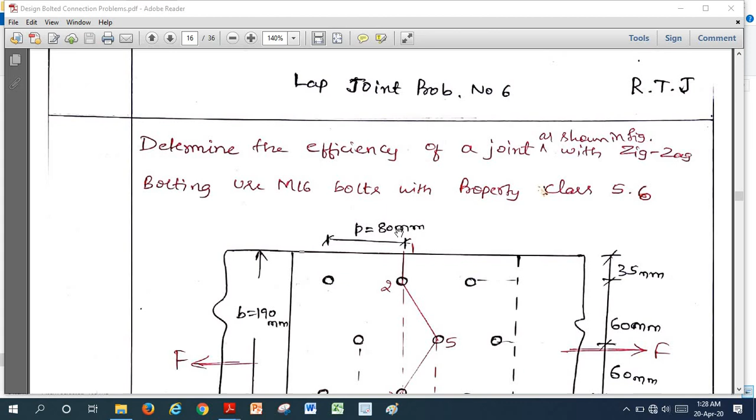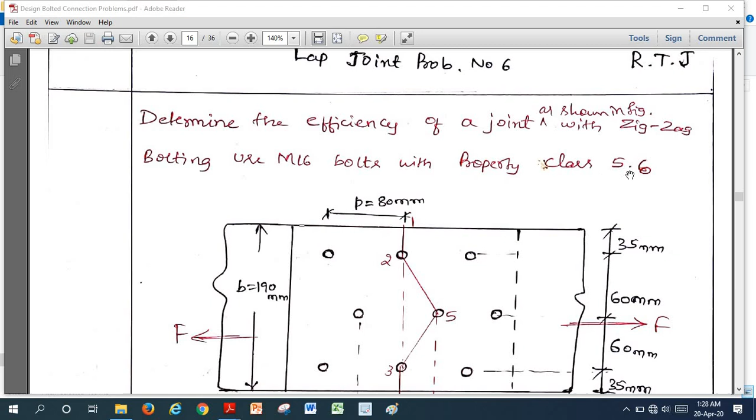Here the bolts are in zigzag form, not in rectangular format. The problem statement: determine the efficiency of the joint as shown in figure with zigzag bolting. Use M16 bolt with property class 5.6 grade. So this is the figure.

They've given bolts 1, 2, 3, 5, 4, 6, 7, 8, 9 here with an end distance of 35, gauge of 60 mm and 35. But the pitch given here in the same row is 80 mm.

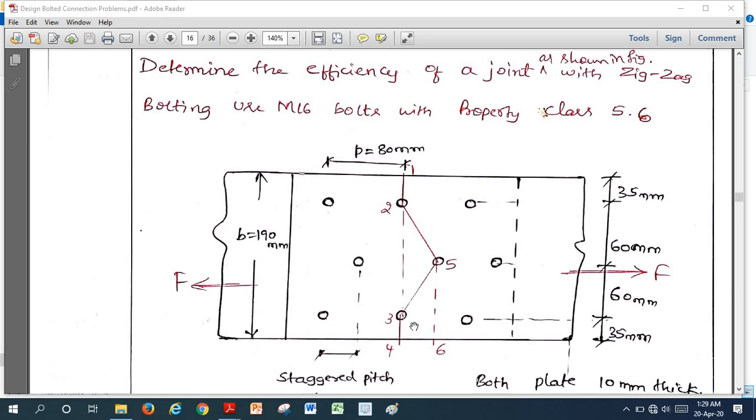If you measure the pitch from the starting column of the bolt to the next bolt, we call it staggered pitch. Whereas two consecutive bolts in the same row we call regular pitch, that is 80 mm along the force direction, perpendicular to force, and 60 is the gauge distance. So this pitch we call staggered pitch, from the first bolt to the next bolt in another row. This staggered pitch is 40 mm.

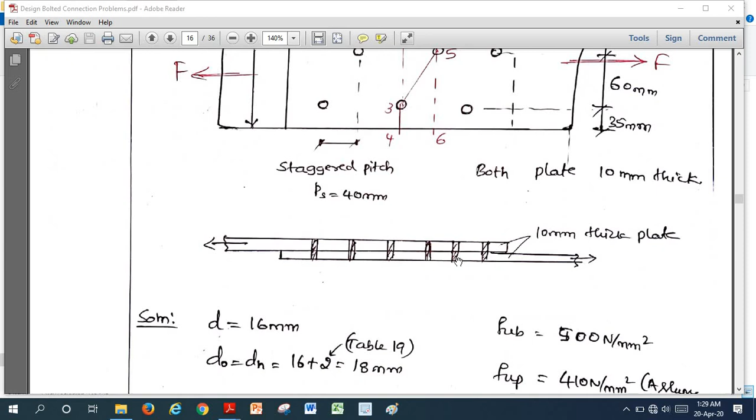Here both the plates being connected are 10 mm thick. So this is another view. Now we know how to write all the data here.

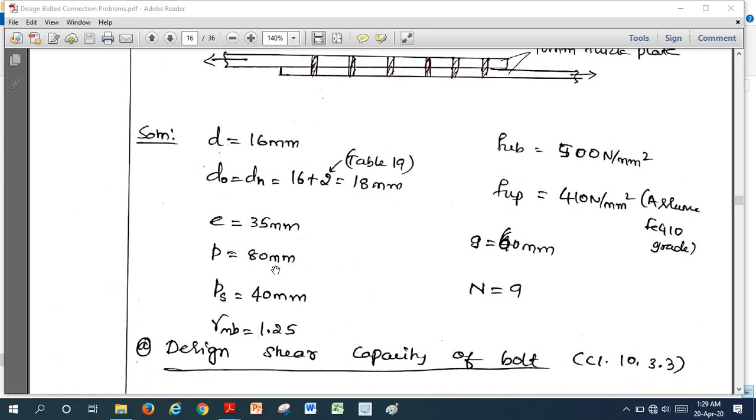Now n is 9, gauge is 60 mm, the distance between two consecutive bolts perpendicular to the force direction. Pitch is 80, staggered pitch is 40, end distance is 35. So here also we should calculate the strength of a bolt in shear and bearing.

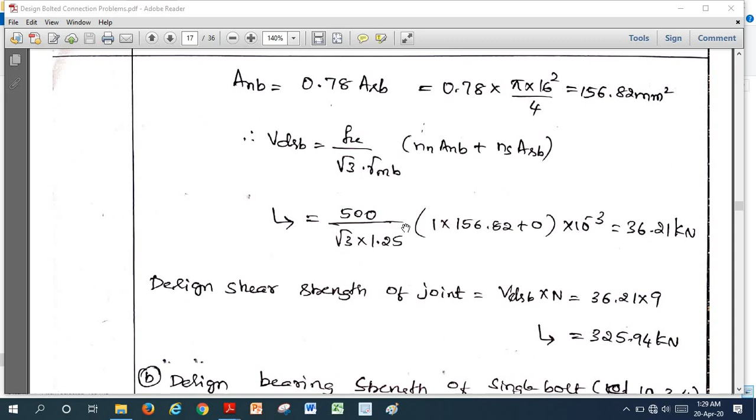If the bolts are in single shear, I will assume one shear plane. We know how to calculate the area. If you calculate Vdsb it comes to 36.21 kilonewton. Design strength of the joint will be number of bolts multiplied by Vdsb, giving us 325.

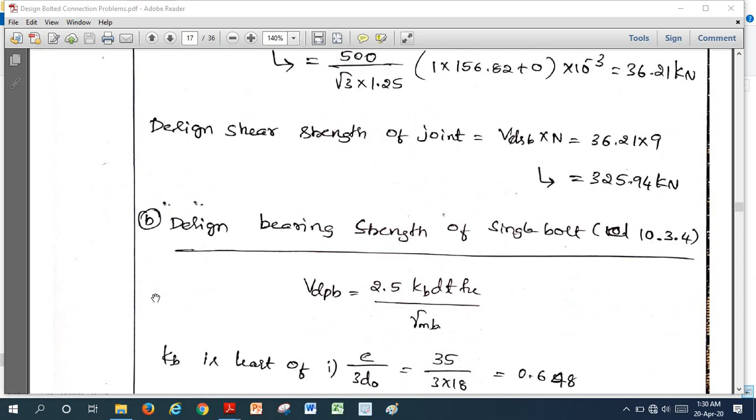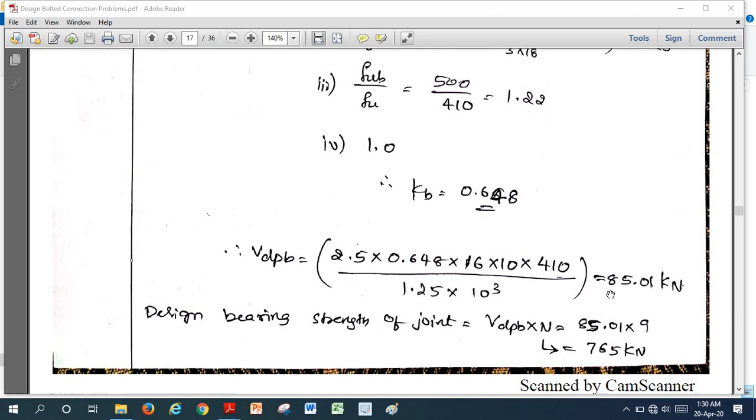Now design bearing strength of a single bolt uses the formula VDPB = 2.5 kb d t fu / gamma mb. We know how to calculate kb, the least value of all four, that is 0.648. Here VDPB, with least plate thickness, given both plates are same thickness 10 mm, gives 85 kilonewton. Multiplying by 9, the number of bolts in the joint, gives the bearing strength of the entire joint, that is 765 kilonewton.

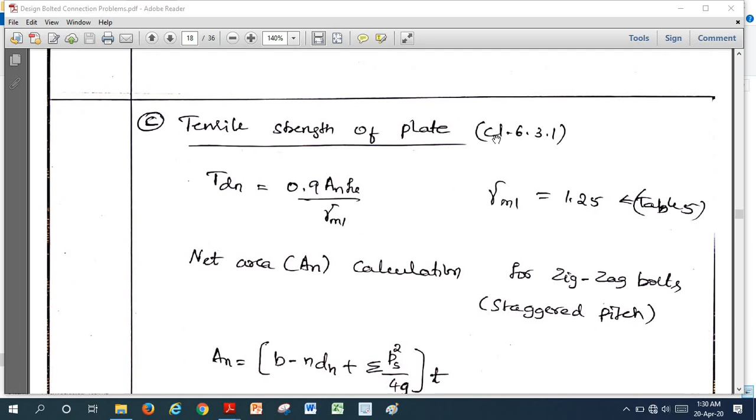Next is tensile strength of the plate according to clause 6.3.1. Here is the formula. If you look into code clause 6.3.1, this is the formula: 0.9 An fu / gamma m, where gamma m is 1.25 for ultimate resistance of the metal.

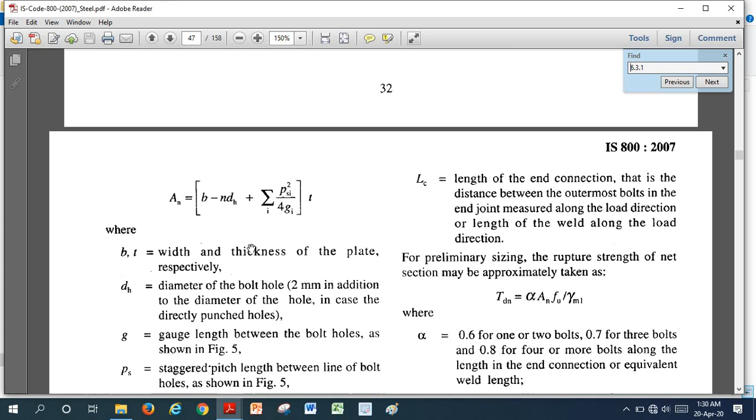So An formula is b minus n*dH plus sigma Psi-square / 4G for each gauge. What is Psi? Psi is the staggered pitch length between line of bolts. G is the gauge distance between the bolt holes as shown in figure, whereas from the first column of the pitch to the next adjacent pitch we call it staggered pitch, that is Psi.

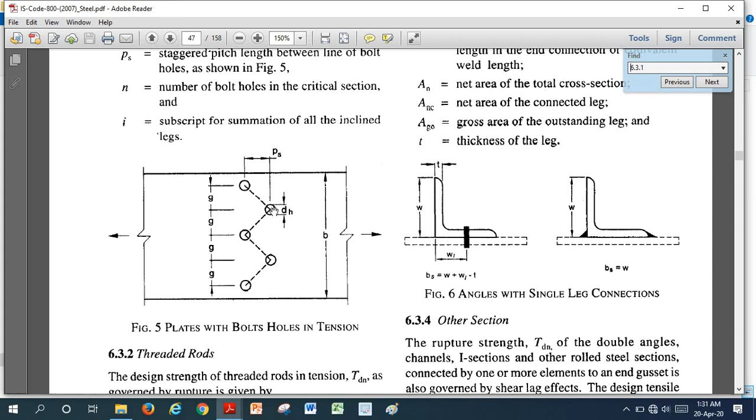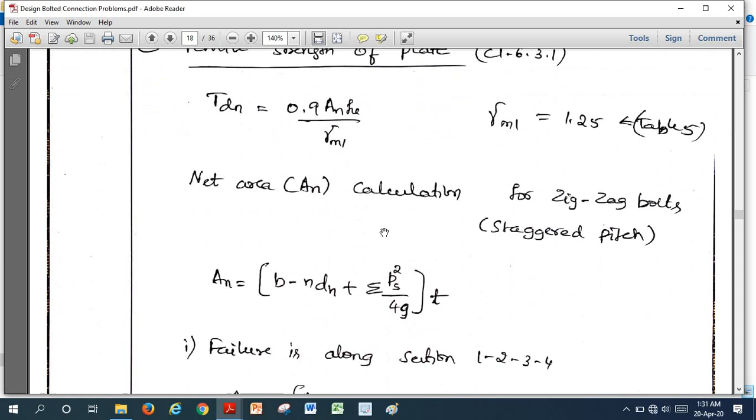B is the width of the plate. Here we should be careful while calculating the tensile strength. All other things are same as the previous problem. Here An calculation for zigzag bolts or staggered pitch uses this formula.

So if you look into the original figure, this is the pattern of the bolts. If you take any section, this is the pattern. The bolt section may fail like this, starting from 1, 2, 3, 4. So along this line, one section may fail - that is the probability of failure of the connection.

Second case may be from here, 1, 2, passing the bolt, after it may come here instead of going here, 5, again it may come back, and 4. That is second case. Otherwise it may go like this: 1, 2, 5, 6. This is the third case. These are the different possibilities of failure of the joint.

So first we're going to analyze all this in detail, and we're going to calculate the area. Whichever has less area, that one we should take as the least value. That is the major thing we need to draw from the analysis.

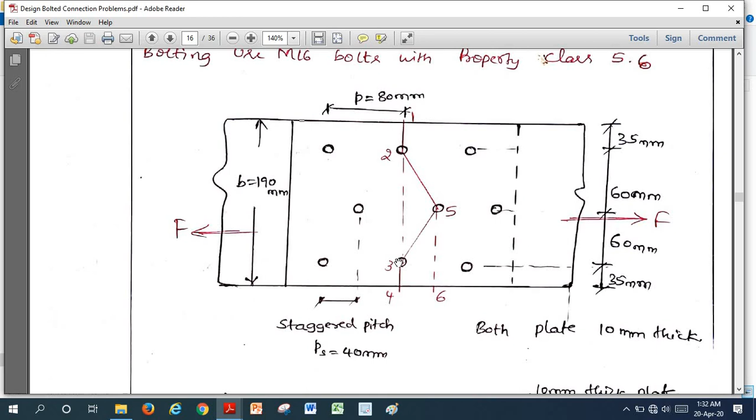First I will take a section 1, 2, 3, 4. If you take here, how many bolts are falling in this section? Only 1 and 2 bolts are falling in this section.

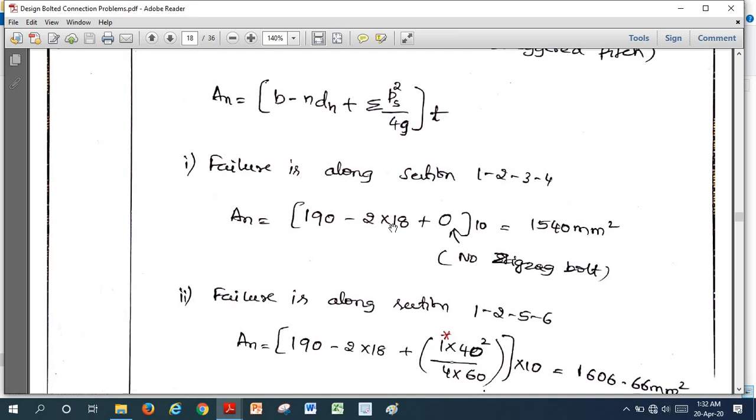Therefore, if we calculate AN, what is the formula? B minus N dh, plus... 18 mm diameter of the bolt hole plus 0. What is this portion that becomes 0? There is no staggered pitch along the section we considered here, so all are in the same line. Therefore the second portion becomes 0.

We're going to calculate AN. Then accordingly, that AN value comes out to be 1540 millimeter square. That is for section 1, 2, 3, 4.

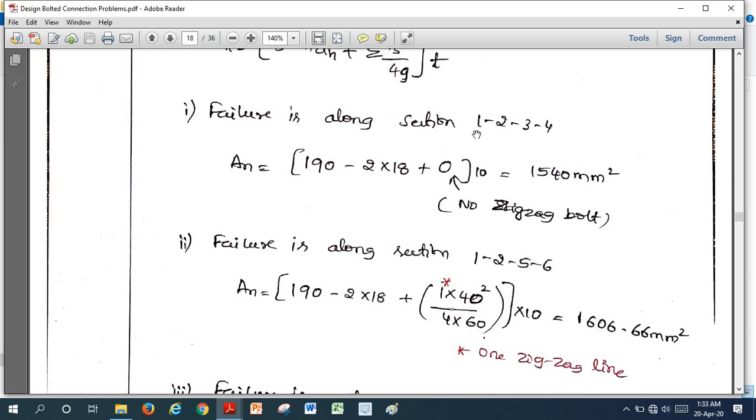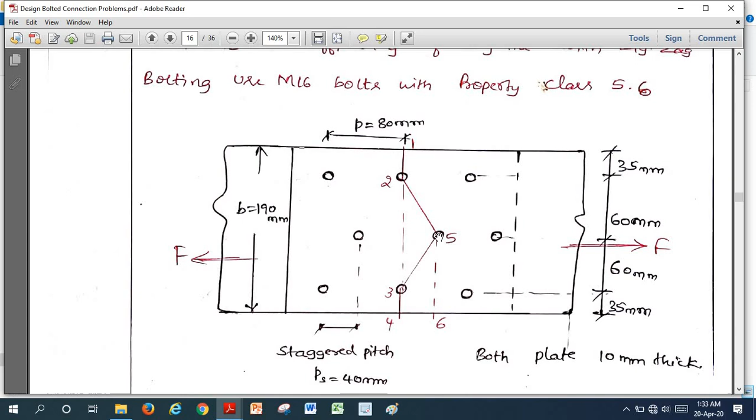If you take section 1, 2, 5, 6, if you see the original figure here, 1, 2, 5, 6 — this is from here, we started along this line. Now we are here, we are going to 5. We are deviating from 2 to 5 for the first time. Again we are deviating to reach 3. Here again we are deviating from this line to this line. So 2 times we are deviating.

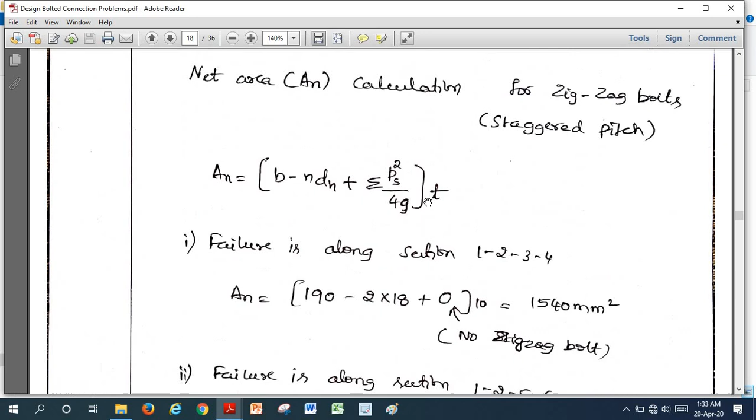That means we need to take 2 times of deviation here. So if you take 1, 2, 5, 3, 4, taking 2 times of deviation, 40 square staggered pitch, 4 into 60 is the gauge distance into thickness. Where, how many bolts are passing? 3 bolts have passed here along the section, where B is the width of the plate, 190.

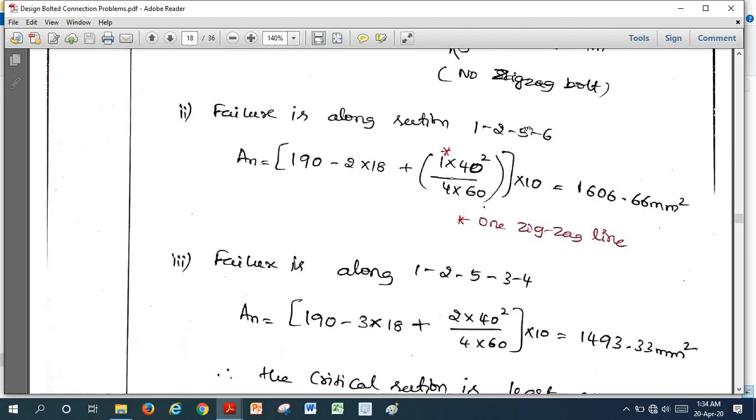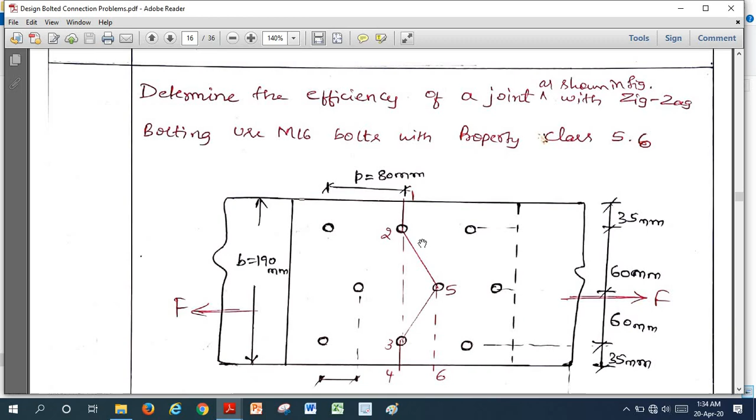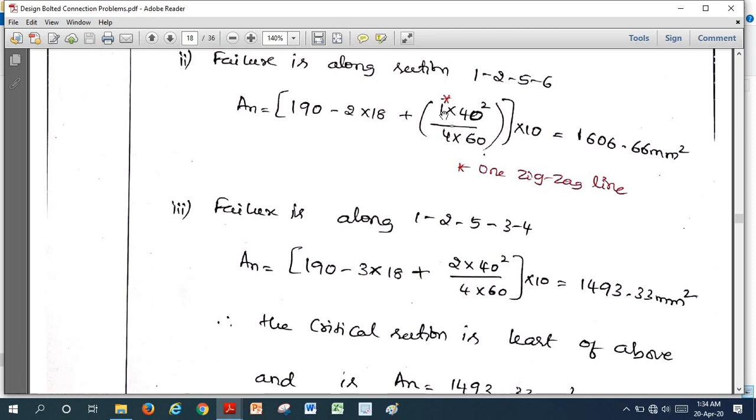So like that we have to calculate the AN value. If we are deviating only 1 time, then we multiply with 1. If we are deviating 2 times, we need to multiply with 2. Depending on how many times you are deviating, we need to multiply the value accordingly to calculate whichever is least A, that will be the critical one.

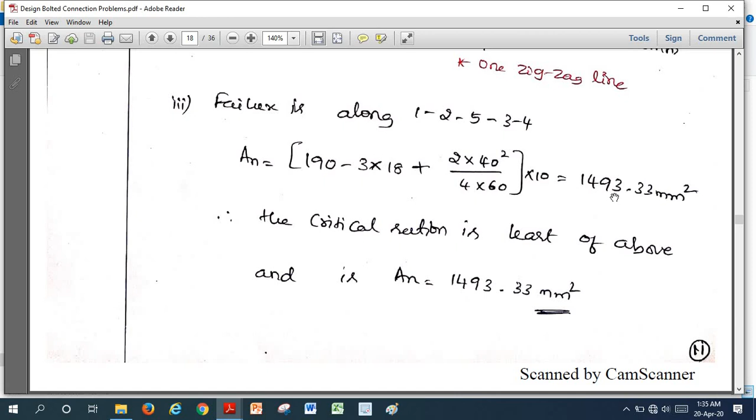Out of this, the 1450, 1493 is the least section. So for this we should calculate the TDN value. It comes out to be 440.8 kilonewton.

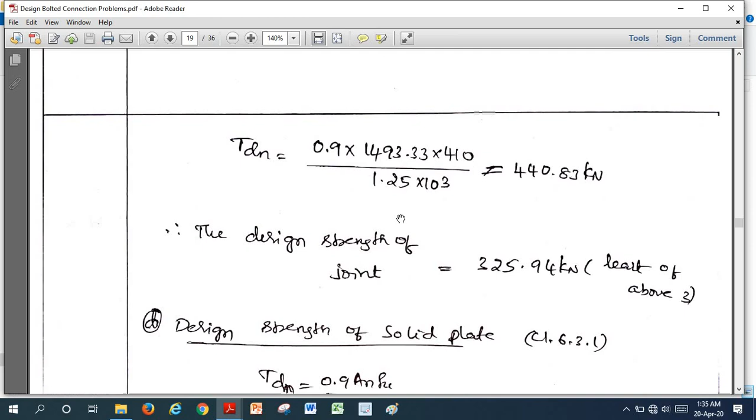We know design strength of the joint will be the least of shear, bearing and tensile strength of the joint, that is 325.94 kilonewton. So if you calculate the strength of the solid plate, using the same formula, here we should take B into T for AN.

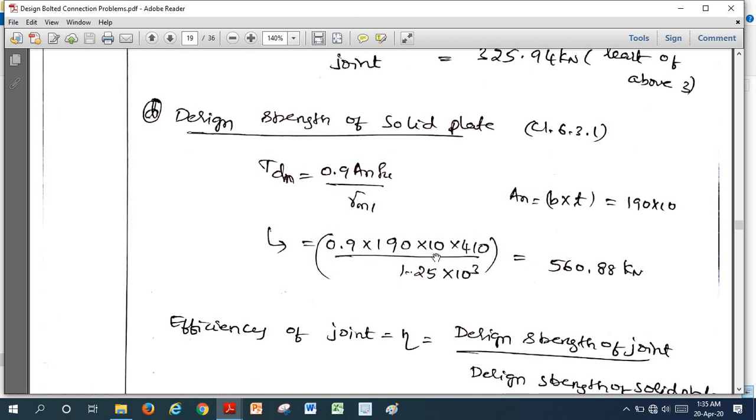F ultimate strength of the plate, AN is B into T. If you calculate, it comes to be 560.88 kilonewton. Efficiency will be least strength by solid strength of the plate, it comes out to be 58.11%. This is the efficiency of a lap joint in case of staggered pitch.